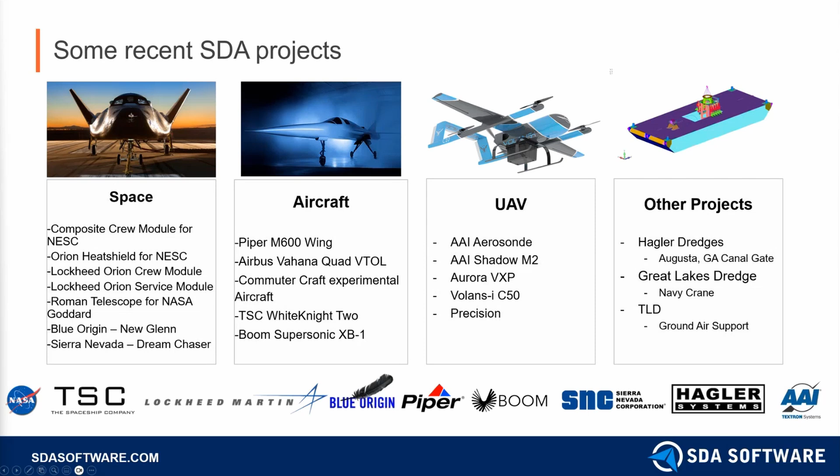Like I said, SDA Software, our specialty is the Simcenter portfolio, including FEMAP, STAR-CCM+, and others. We offer training, support, services, and that's background about the company.

But first, let's talk about Simcenter. What is Simcenter? What is included and how does it interact? Simcenter is the simulation portfolio from system simulation like Simcenter Amesim to component simulation or vehicle simulation for CFD, FEA, or other multiphysics offerings. And there's also the testing hardware and software. One thing that I'm going to cover later is how Simcenter STAR-CCM+ can integrate with HEEDS, which is a design exploration algorithm, and Teamcenter, which is a PLM data management solution.

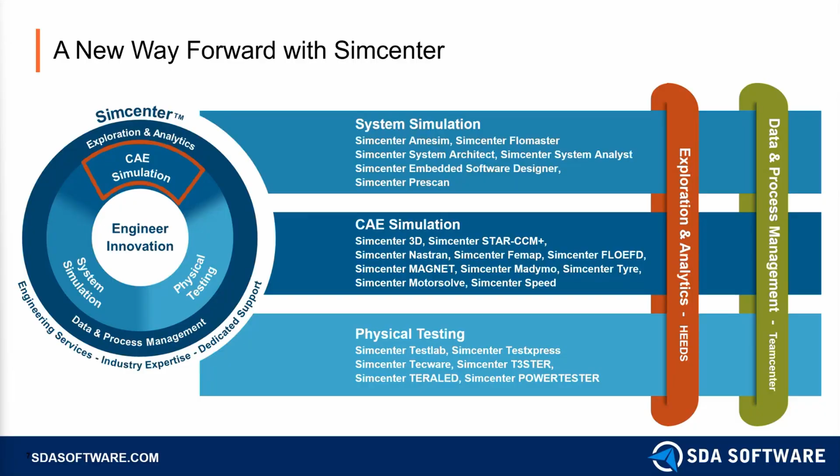What are the different CFD options? Who are they for? And what are the pros and cons? For a lightweight CFD solution, there's Simcenter FLOEFD, and this is primarily targeted for design engineers, mechanical engineers. Then we have Simcenter Flotherm, which is a specific electronics cooling solution for thermal engineers. It's targeted because of the libraries with built-in components that come with the solution. You're able to get the software and plug your components in so that you can very quickly and accurately recreate your configuration.

Then there's Simcenter 3D, which is a solution for FEA engineers. One of the key offerings is the TMG solver, which is an advanced space systems thermal radiation solver. And then finally, there is the flagship CFD solution, Simcenter STAR-CCM+, that is both integrated and has advanced multiphysics, and we're going to dive into this later.

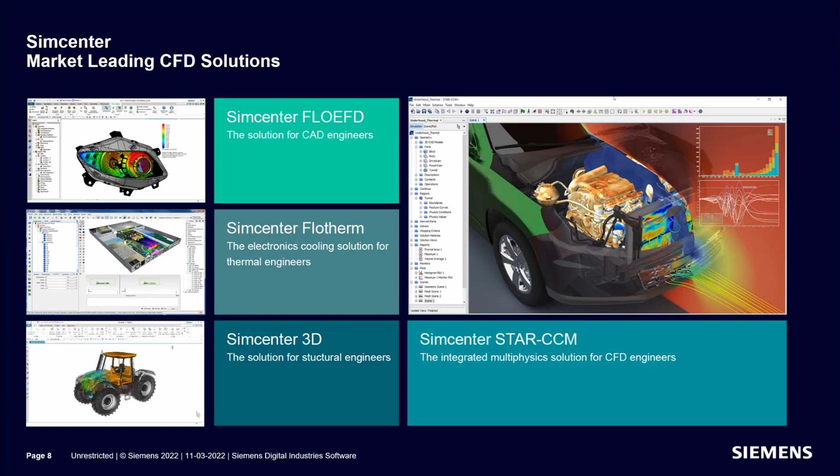But at this point, I just want to emphasize there is a solution for everyone. If you're a designer, analyst, or researcher, there's a solution for you. Like I said before, FLOEFD is made for designers. It's CAD embedded. And for general multi-purpose problems, there's Simcenter STAR-CCM+.

What is the difference between CAD embedded and traditional CFD? In this case, we can think of FLOEFD as CAD embedded, and Simcenter STAR-CCM+ as traditional CFD. The key takeaways from this table is that CAD embedded is lightweight. You can run it on a laptop. You don't need additional HPC resources. You don't need to be a CFD expert, and you can solve basic CFD problems.

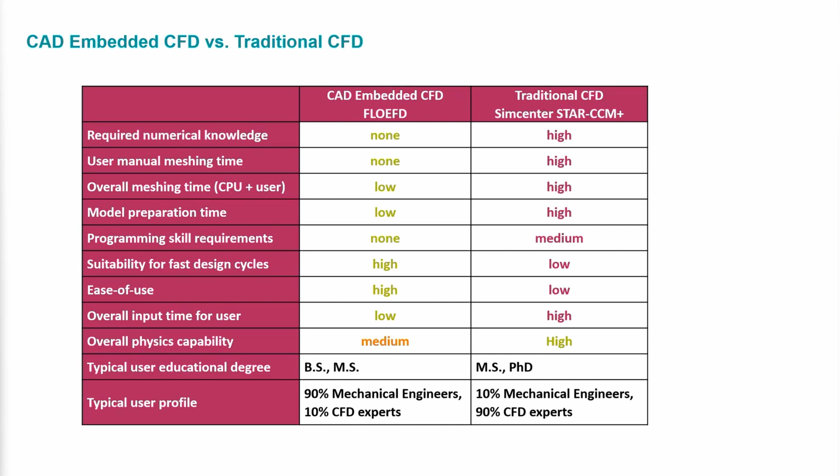The limitation is that it doesn't have the advanced multiphysics capability, which is where Simcenter STAR-CCM+ enters the picture. It does have a very high capability. It can solve a wide range of multiphysics problems. But with that comes the requirement for HPC resources, and the requirement for a CFD expert. So different solutions for different projects and organizations, and it just depends on what your needs are.

I saw this LinkedIn poll by Holger Marschall, and he asked what are the biggest challenges for you to adopt CFD for an industrial application. I kind of see this as a general CFD adoption question. You can see there's 500 votes, and the number one by far is the cost of licensing, followed by model preparation and simulation speed.

Whenever we're approaching the question of should this project or our organization be adopting CFD, the very first question we need to ask ourselves is what is the return on investment. In some cases there's a hard number, for example I had a customer who said a 1% improvement is going to be a $2 million return on investment. That's pretty clear direction.

I've had other customers say, well, it's hard to quantify, but it's really important for emphasizing our offering as a technical differentiator. So in some cases you can quantify it, in other cases it's more subjective. But before we get into the details, that's the question we need to ask and internalize before approaching these other options.

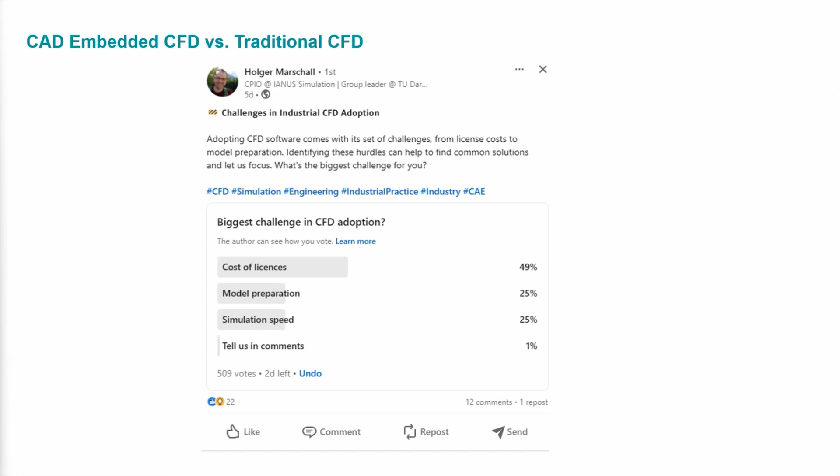Second, in terms of the cost of licensing, there are many options. This is why I highlighted the CAD embedded solution, because the cost of the license, everything is affected. The cost is significantly reduced across the board at the compromise of the advanced multiphysics offering, which wouldn't be available. So what I want to communicate in this slide is that we are committed to your project success, whether that's as services or software, and there's not one size fits all, and we can do a lot of things to reduce the cost or be efficient. I just wanted to highlight this because I thought it was a really interesting question.

Okay, now it's time to dive into Simcenter STAR-CCM Plus, a brief overview of this tool. What I'm going to be emphasizing in this presentation a lot is integrated workflows and advanced multiphysics. In the pictures you see here, we see some of the advanced multiphysics offerings, from marine application to turbine, multi-phase, Eulerian, Lagrangian, VOF. We have species interactions with the combustion, mixing, and the external aerodynamic analysis.

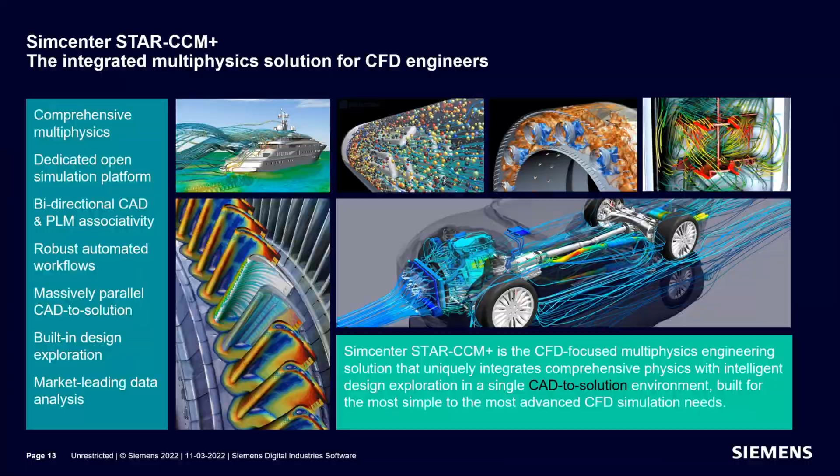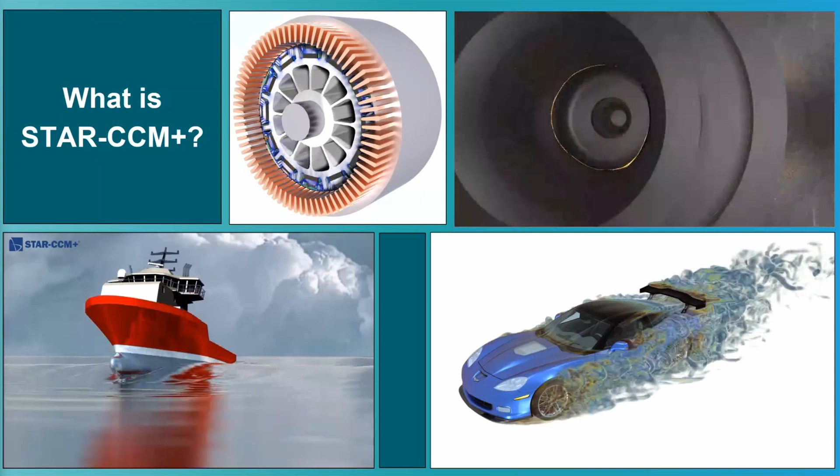Here are a couple more examples. On the top left, we see motion combined with electromagnetism. On the top right is a special add-on module, which is the in-cylinder simulation, and that allows you to model the atomization and combustion characteristics inside of a cylinder. The bottom left is a marine example of a vessel going through waves, and on the bottom right is external aerodynamics.

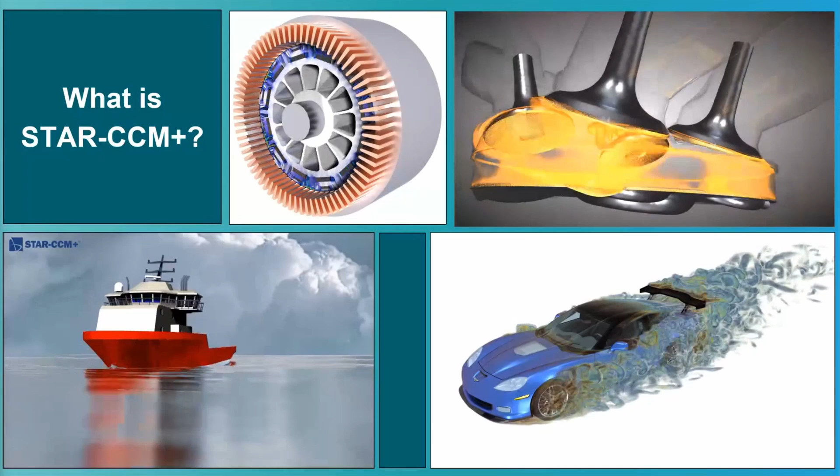Workflow automation, what does it mean to be integrated? In STAR-CCM Plus, you have the ability, let me just highlight these. A key value add is that you can import your CAD, create the volume mesh, set up the physics and solve your solution, and post-process the results in one integrated user interface. In addition to that, you're able to make a change, say in the CAD, which I'm going to show later, and propagate it through the workflow with minimal interaction. So it's integrated and it's self-contained.

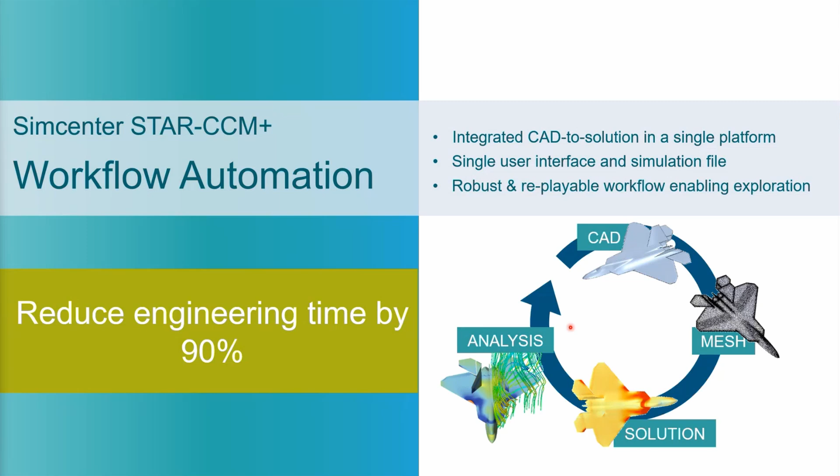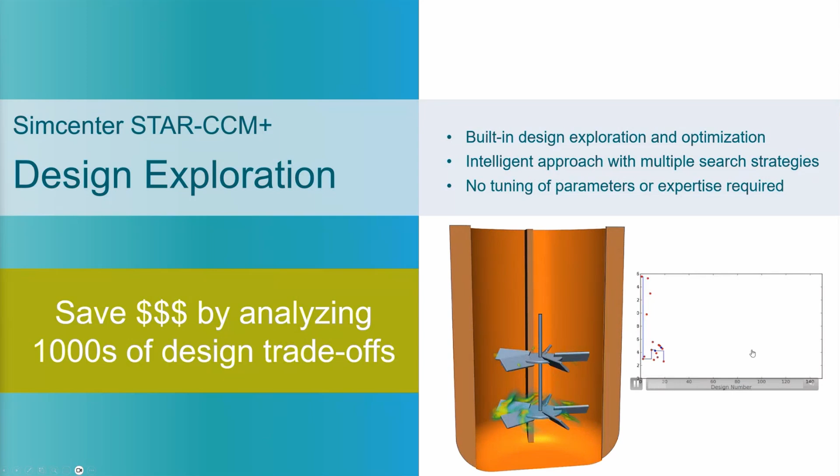Here's the design exploration. This is built in to the tool. This is showing an intelligent design exploration of a mixing tank where we changed the angle of attack, the number of mixers, the chord length, and the baffle configuration. With these inputs, the intelligent optimization design manager is able to examine and output an optimized design.

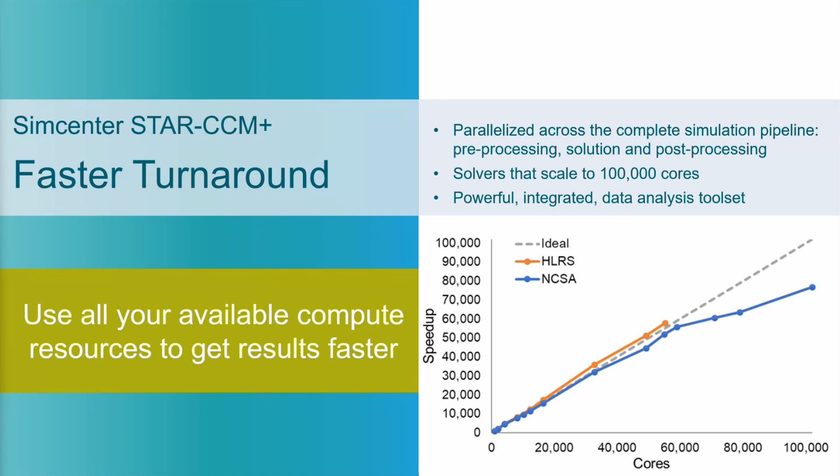Another thing I want to emphasize is that STAR-CCM Plus is scalable. If you have a large production problem that requires tens of thousands of cores, this is a good solution. Not only that, the main default license has unlimited cores, so you don't have to buy individual core packs to get more availability to adopt more cores. It comes with the default license. In addition to the default license, there's power on demand, which is a pay as you go option to rent a production license. There's also tokens as well as cloud enabled credits, so you can use the interface directly to access the license and solve.

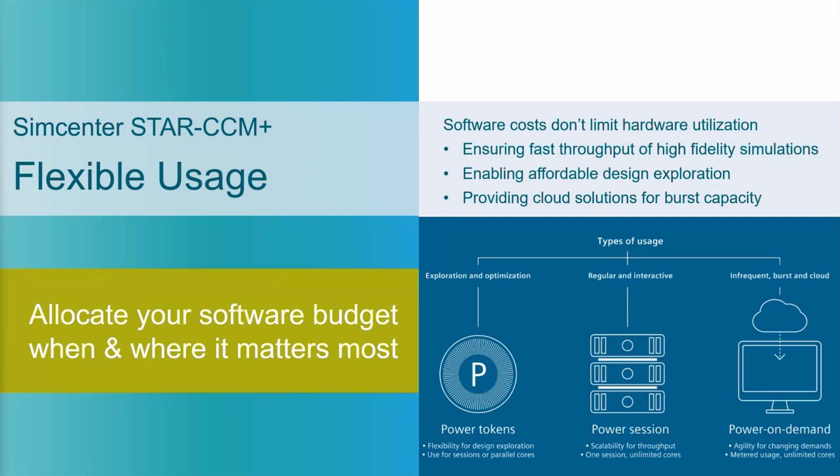Okay, now we're ready to jump into the demonstration. The demo today is going to focus on the workflow that I previously described and the design exploration capability of a simple ball valve problem. First I'm going to show how we can use Simcenter STAR-CCM Plus to obtain detailed engineering insights into the valve performance. Then I'm going to quickly and simply generate and test design variants within the tool. Finally, I'm going to look at different ways we can automate a design change for exploration purposes.

Again, the focus of the demonstration is on the workflow, and this happens in three main phases: build, test, and assess. In the build phase, this begins with the CAD, where we manipulate and prepare the domain.

Domain for computational discretization or meshing. In many cases, a significant amount of time can be spent on developing the first volume mesh, and Siemens has invested much development effort into reducing the time it takes to create that volume mesh.

Then we have the test phase, and this represents the validated physics models available in the software. All of it, I would say, except for a couple of special examples, like I showed before, the in-cylinder - there's also a battery design module. But besides those, all of the multi-physics capabilities are available with the default licensing.

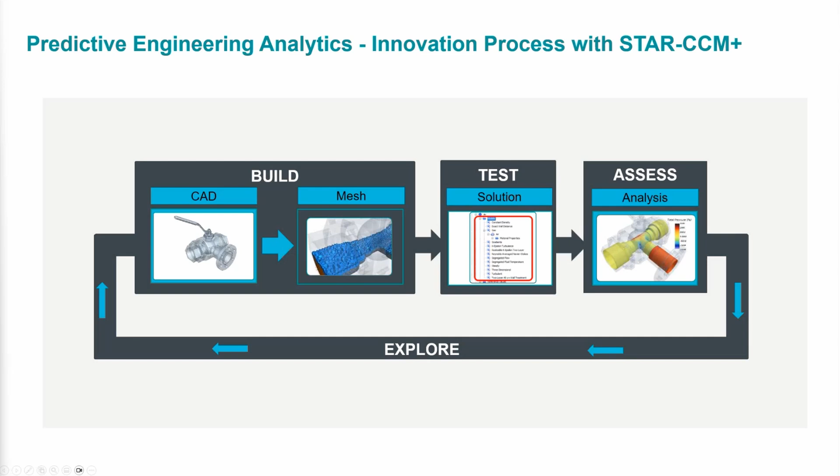So we begin with the build phase, and what I'm going to show you first is a tour of the intuitive graphical user interface. Then I'm going to prepare the CAD for volume meshing by creating end caps on the inlet and two outlet surfaces.

With these end caps, I'll be able to extract the fluid volume and then assign this domain part to a region so I can set the boundary condition types. And then finally, I will create the automated volume mesh.

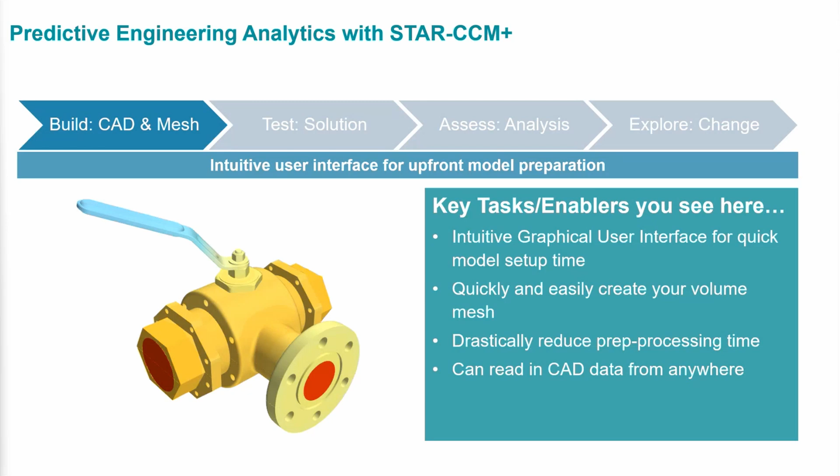Okay, so let's dive into the demo. Okay, so here is the user interface.

On the top left, we have the simulation tree, and this represents the different phases of the workflow. Below, we have the property window, which is where we enter the specific information for the associated selection in the simulation tree. Below that, we have the output window, which gives us the output of the current operation. And in the main viewing window, we have the model where we interact.

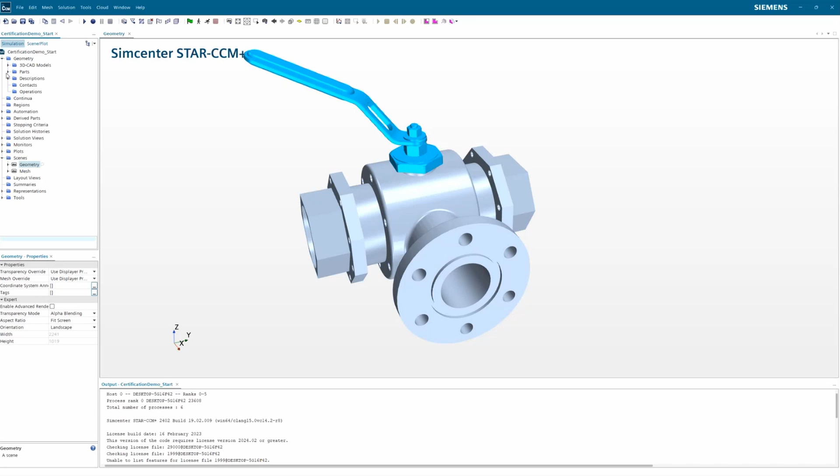Okay, so while I create these end caps and prepare the CAD for meshing, I just want to highlight some of the CAD related value adds that are available with STAR-CCM Plus.

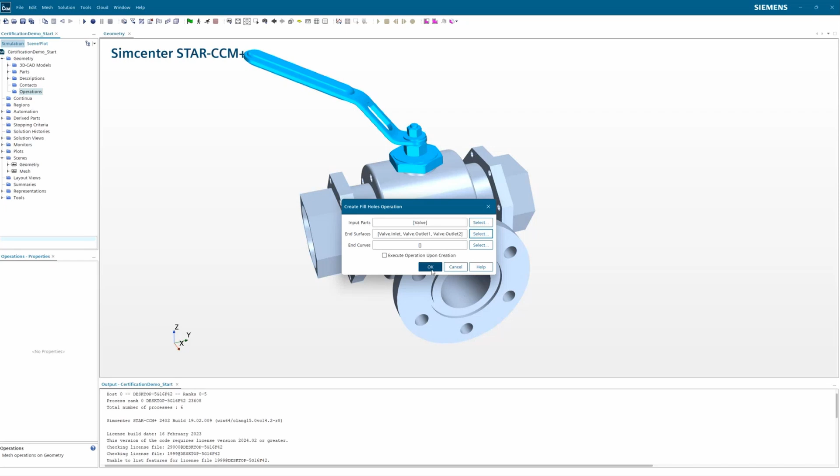And the first is the NX to STAR-CCM Plus connection. What that means is if you're an NX user, you have the ability to get this add-on where you have CAD client bidirectional transfer of parametric data.

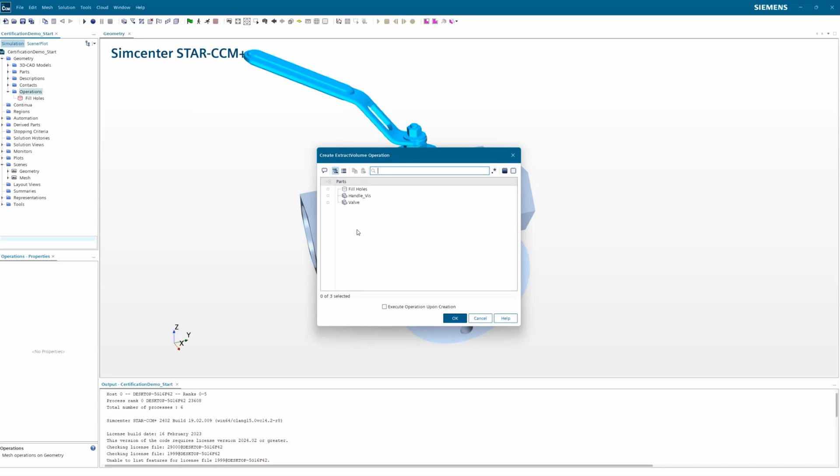And what this means is that in NX, you're able to define your CAD parametrically, or define different characteristics parametrically that you want to change or explore. You're able to connect directly to STAR-CCM Plus and have the CFD analyst access those parameters, modify those parameters, and then have it send back to the NX designer.

And that's very powerful, especially if you're in a PLM configuration.

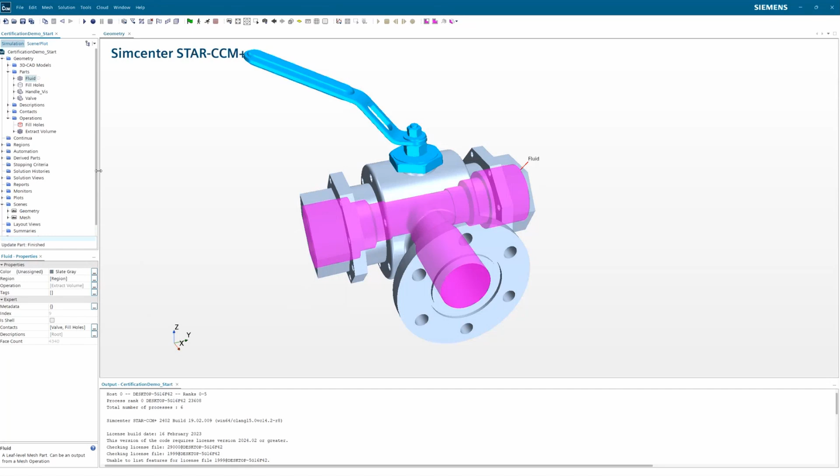And then the other CAD add-on is the CAD Exchange, which gives you the ability to interact with CAD native file types. So for example, I'm working with a customer who uses SolidWorks, and I'm able to directly interact with those part files, which is beneficial because I'm able to see the exact same surfaces that the designer is able to see.

Which is very helpful. And then finally, STAR-CCM Plus without any add-ons has the ability to interact with the CAD neutral file types, and it's best to use the parasolid file type, that's period x_t. And that's important because that's the Siemens kernel, and that's what's recommended.

Okay, so now ready to volume mesh.

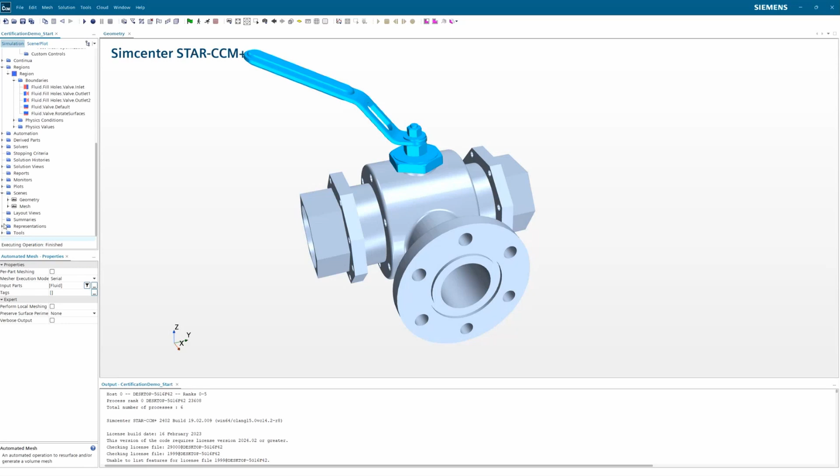Okay, so I just ran through all of the build actions.

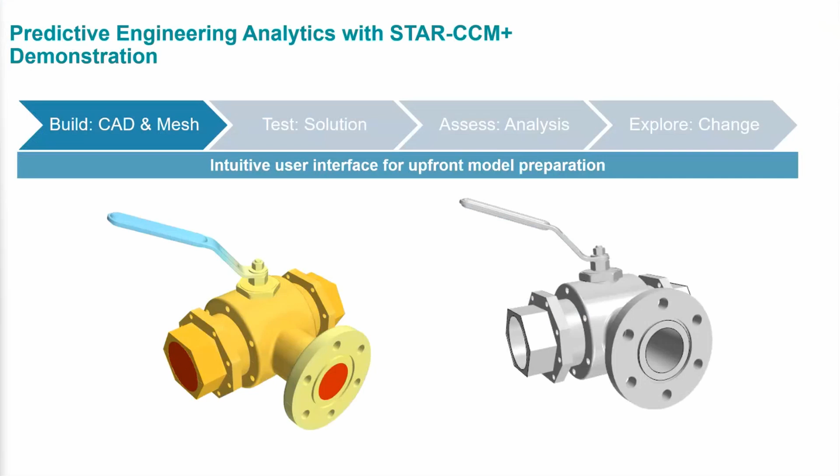You can see while I was talking, I was able to significantly reduce the pre-processing time by quickly interacting with the CAD model itself using the CAD preparations, the fill holes and extract fluid volume. This improves our accuracy to maintain associativity to the design data, which enables us to have quick and accurate investigation of our early design concepts.

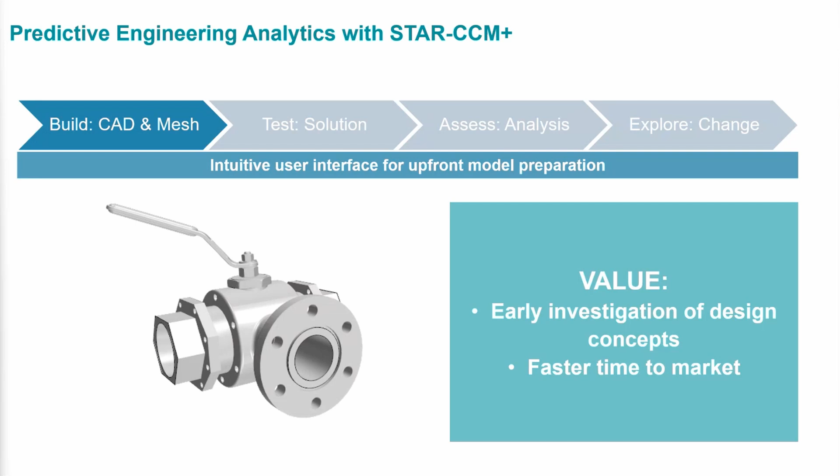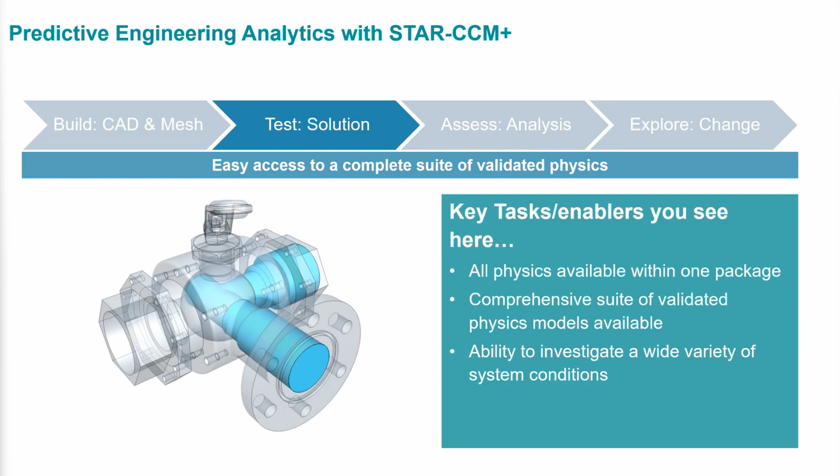Now we're ready to move on to the test phase. In this section, I'm going to create the physics continua and select the physics models through an interactive wizard for our problem today. It's going to be steady state water flowing through our valve assembly. I'm then going to change the inlet mass flow rate and adjust the stopping criteria.

Okay, let's jump into the demo again. So while I'm selecting the models, I just want to emphasize the design paradigm behind STAR-CCM Plus.

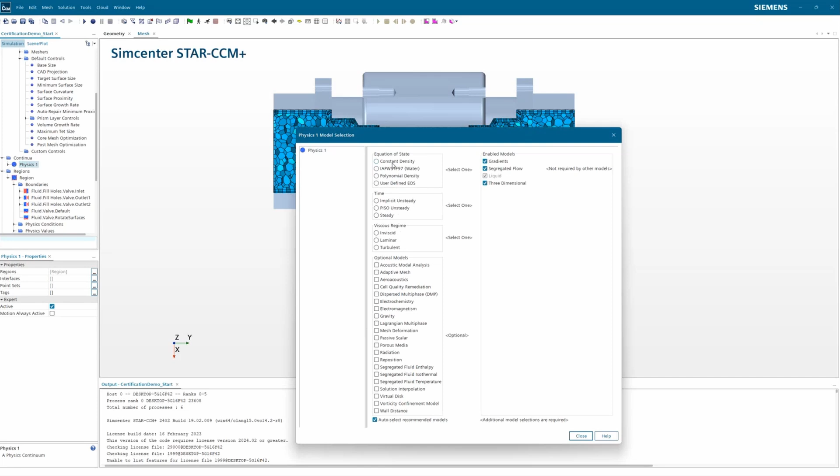Siemens, and previously CD-adapco, has taken the design approach of developing the code so that the different physics models are able to interact with each other. This is obviously not true for every case, but that is the design approach and intent that they've taken. So what this means is that you are able to model

different multiphysics in the same simulation. Furthermore, what it means is that models are not siloed so that you can only use them one at a time.

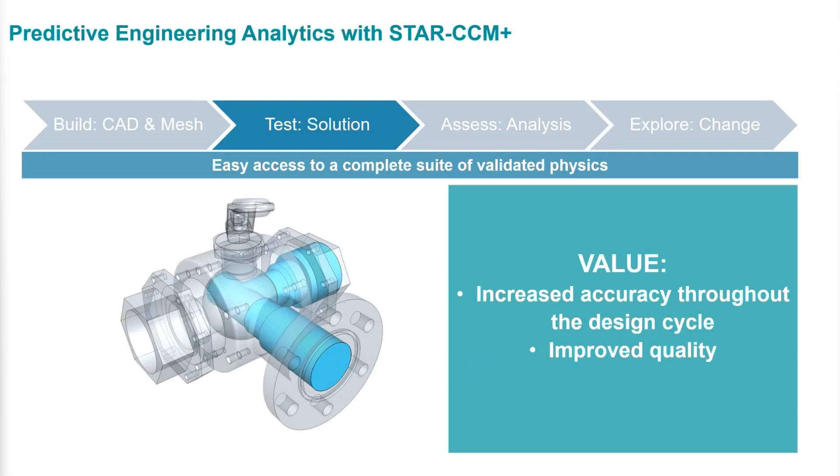Okay, I'm just going to adjust the stopping criteria because I know it converges pretty fast. And that concludes the test phase. So I was, in a matter of seconds, able to quickly and easily select our models for today's simulation. This is going to allow us to investigate a variety of different scenarios and increase our accuracy throughout the design cycle.

Okay, now we're ready to move to the assess phase. In this phase, I'm going to create mass flow rate reports on the outlet surfaces and pressure drop reports between the inlet and the two outlet surfaces.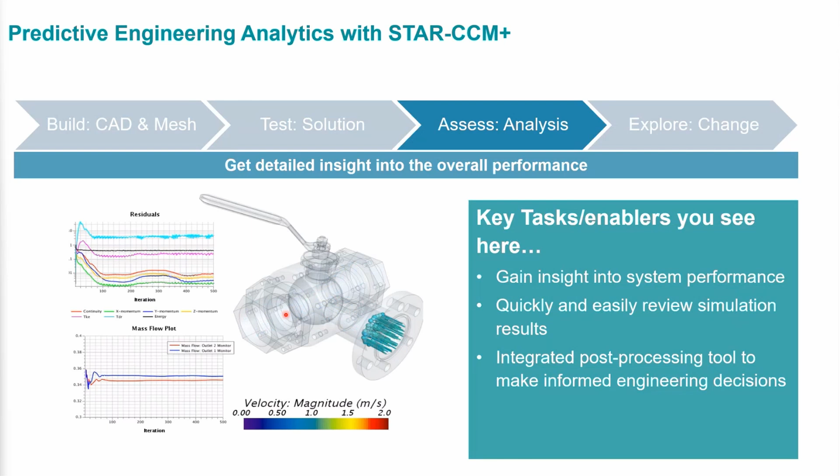Then I'm going to create scalar and vector scenes of the pressure and velocity fields so that we can visualize the results. And then finally, I'm going to run the simulation.

One thing to note about Simcenter STAR-CCM+ is that there's no hidden residuals. All of the residuals are shown when you run the simulation, and that's so that you can understand how your simulation performs without anything going on in the background.

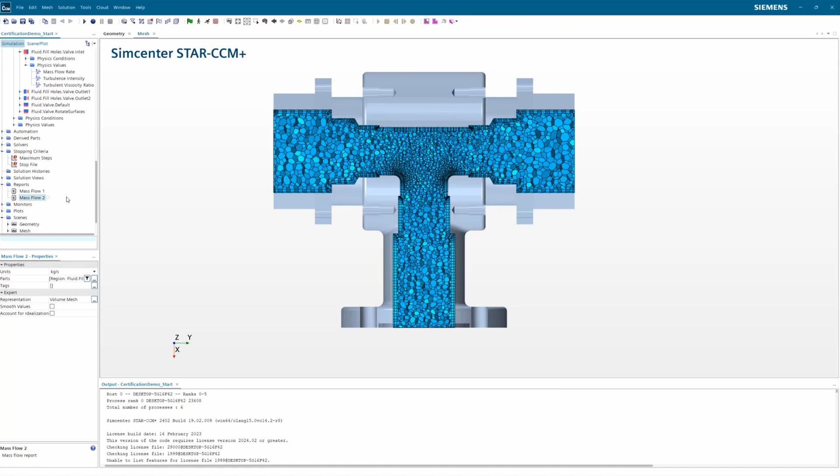And then another thing I want to emphasize is that the reports that I'm using today are built in, and that's really helpful because I don't have to create any custom script. If I want to know the flow rate on these surfaces, there's a report for this. There's a report for this function.

The reason why I'm creating these reports is so that these are engineering quantities of interest that we want to view as the simulation progresses. This is another important way of tracking convergence.

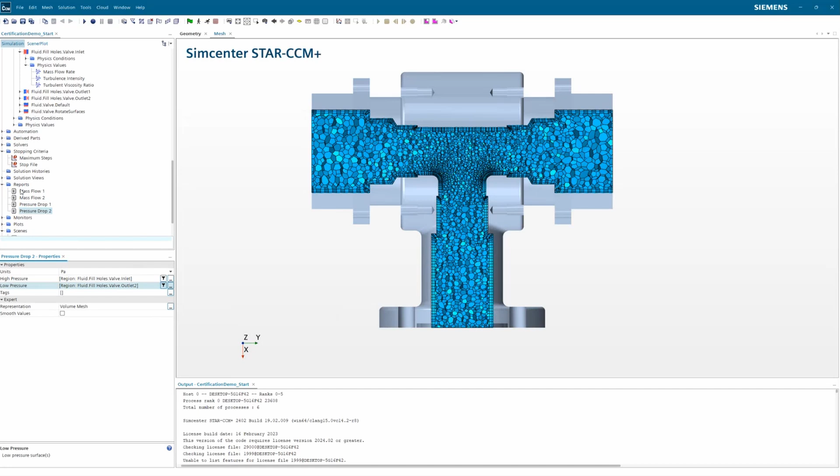Okay, so from these reports, I can create monitors and plots. This is one of the tools we're going to use to understand convergence.

Now I'm ready to create our scenes.

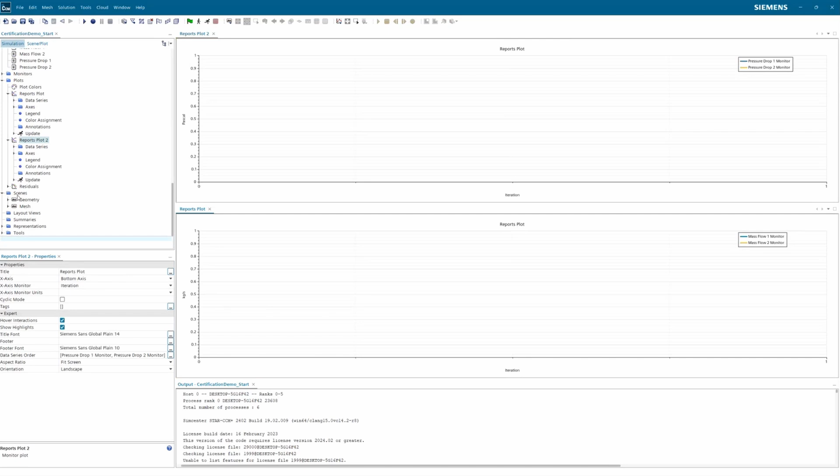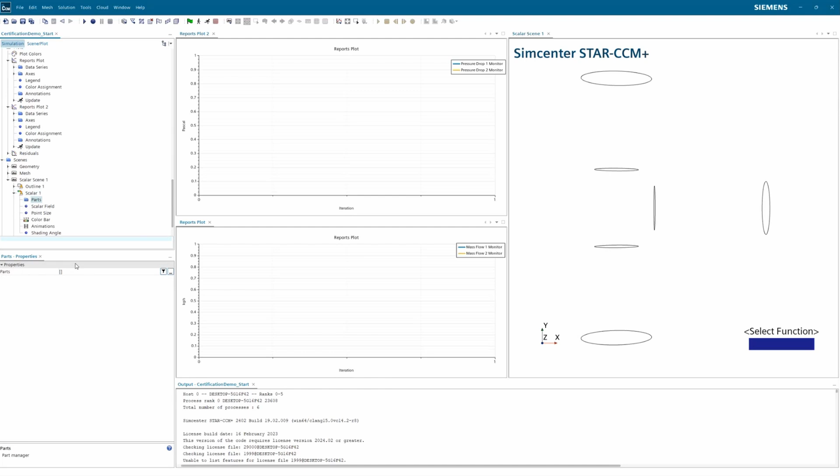So one of the attributes that I really like about the post-processing is that I'm able to include multiple scenes in the same view. In this example, I'm showing that we can view pressure on a cut plane through our geometry.

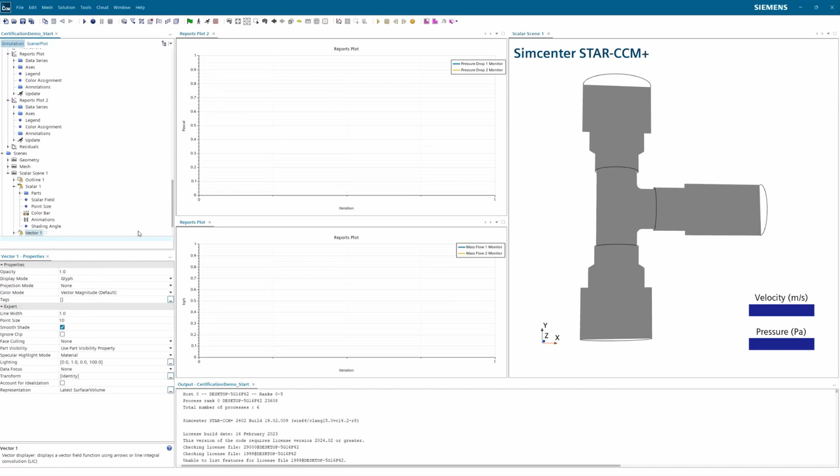And in the same scene, I can add the velocity vector field on the same surface so that we can see the pressure and velocity on the same view. We can highlight that by changing the color bar.

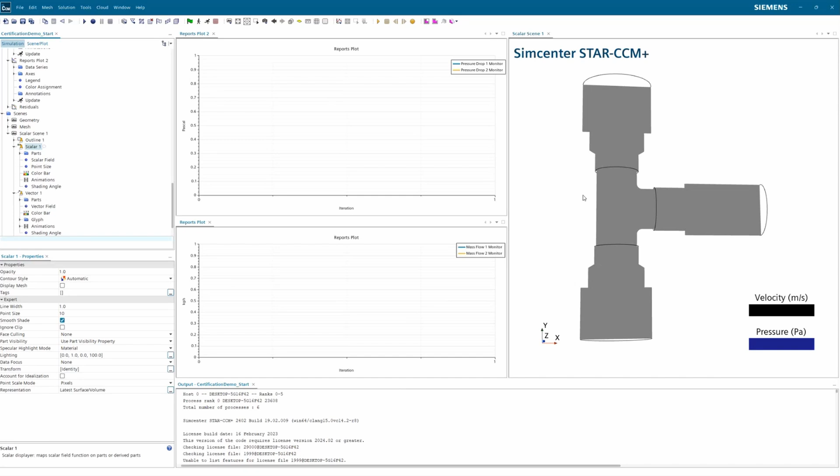Okay, so now we have set up our reports and plots and scalar scenes before we run, so that we can understand and visualize our results.

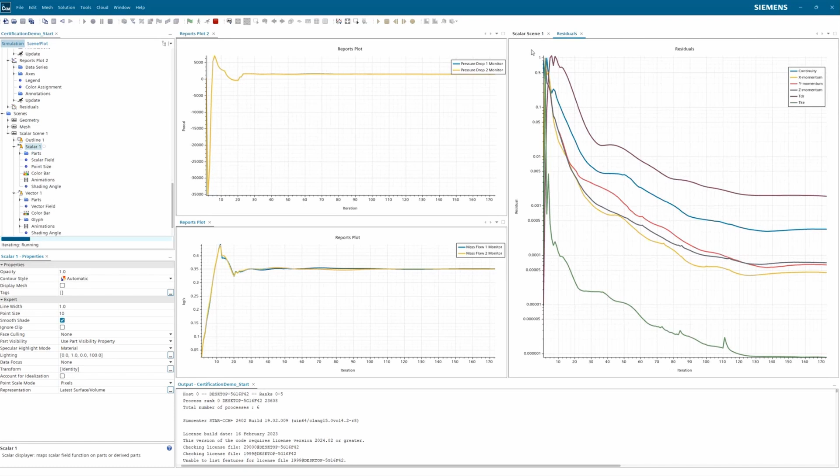Okay, we can see that the residuals automatically pop up. And we see that both the pressure drop and mass flow converge very quickly.

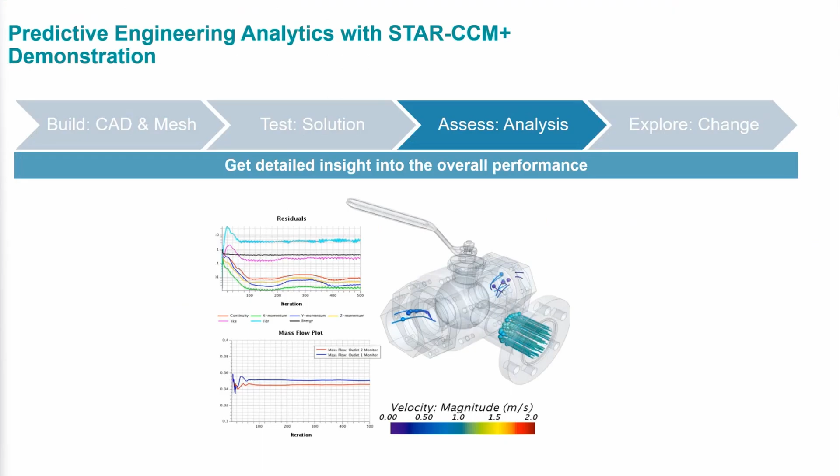So the value here that I just showed, I just created what we can think of as a baseline CFD simulation. I was able to do that very quickly to create a concept design of our fluid component and analyze its behavior.

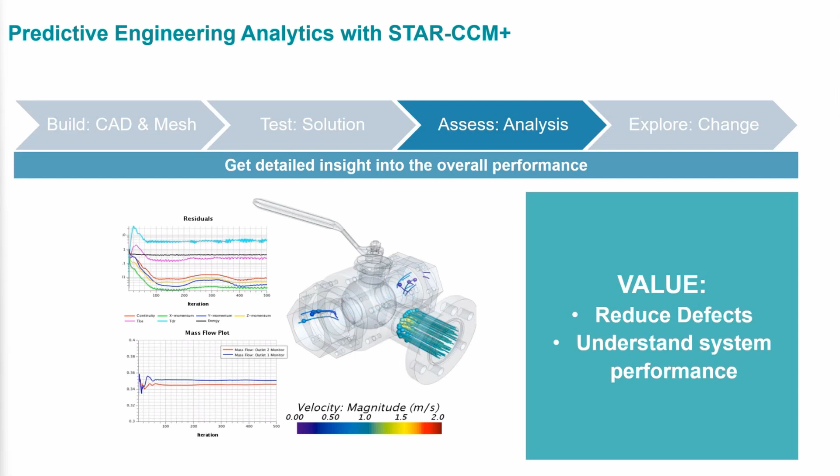Now that we've completed the 3 basic phases, we're going into the design exploration phase. In this simulation, we defined a parametric value associated with the valve position called rotate angle. I'm going to revisit the build phase, change this parameter, which will modify the geometry, and propagate that through the entire workflow. Then I'll increase our stopping criteria, rerun the simulation, and at the end show you how we can automate this change.

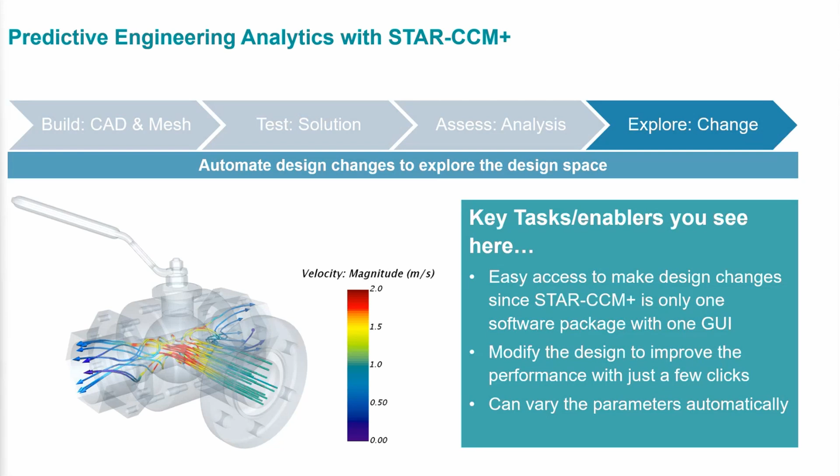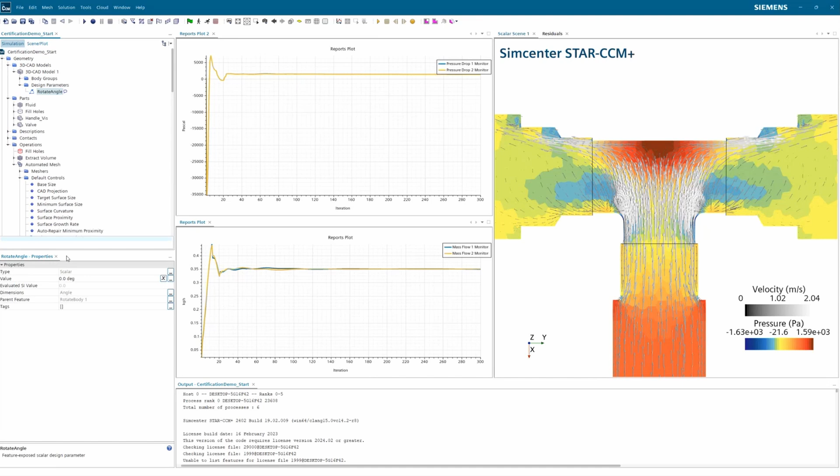Okay, let's jump back in. Here's our previous run. I'm going to revisit the geometry phase, and we can see that rotate angle is a parameter that's defined. I'm just going to show the geometry scene so we can see how this change will impact our model, and change the opacity so we can understand the ball valve configuration. So here you can see it's at 0 degrees, totally open.

Okay, so now I'm going to change this parameter to 60 degrees. When I did that, you see there are warning indications next to the CAD and mesh. What this means is that a change has been made and the current configuration is not as it was before.

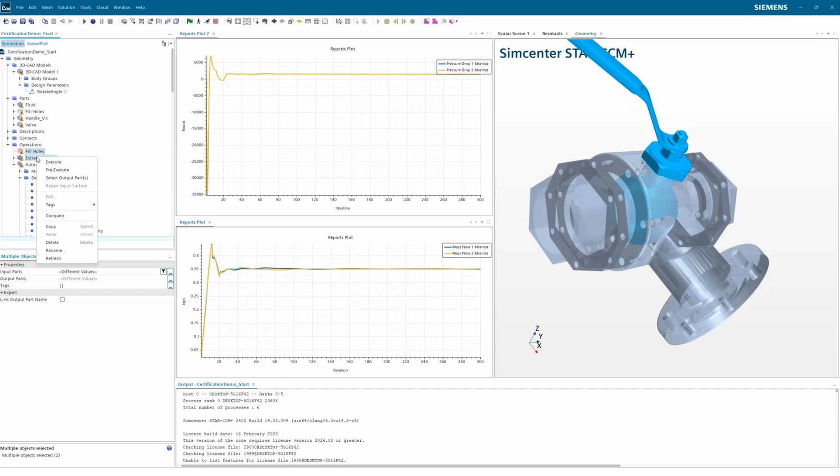What I like to do as a debugging tool is execute the CAD operations first, because often in a production simulation you may have millions or tens of millions of cells, and it may take some time to mesh. So I like to check the CAD operations first before meshing to confirm this is the behavior I want to see. As you can see, the valve position has rotated in the counterclockwise direction 60 degrees. This is the behavior we want to see, and that gives us the confidence to remesh.

You can see here in the properties, called mesher execution mode, I have it set to serial, but you're able to get a couple of multiplication factors by changing it to parallel, which is one of the ways Siemens has enabled you to speed up your volume meshing.

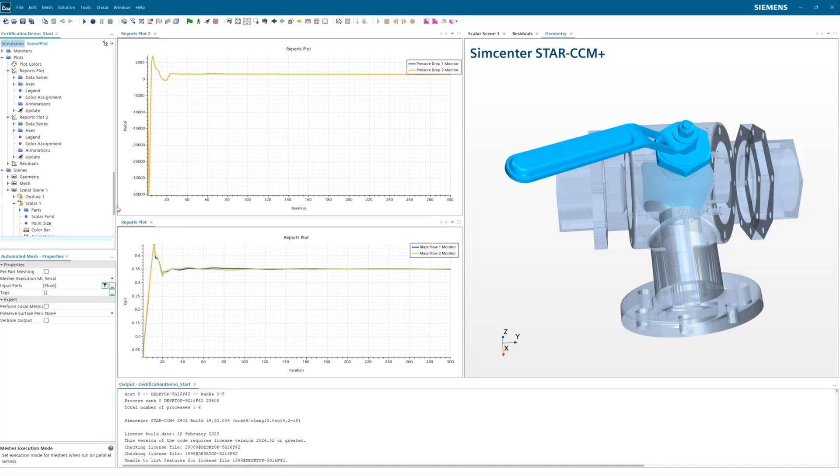Okay, let's view the volume mesh. So by changing that parameter and propagating it through our build workflow, we're able to see that the mesh updated automatically. I didn't have to go visit anything else, I just made the change and executed it.

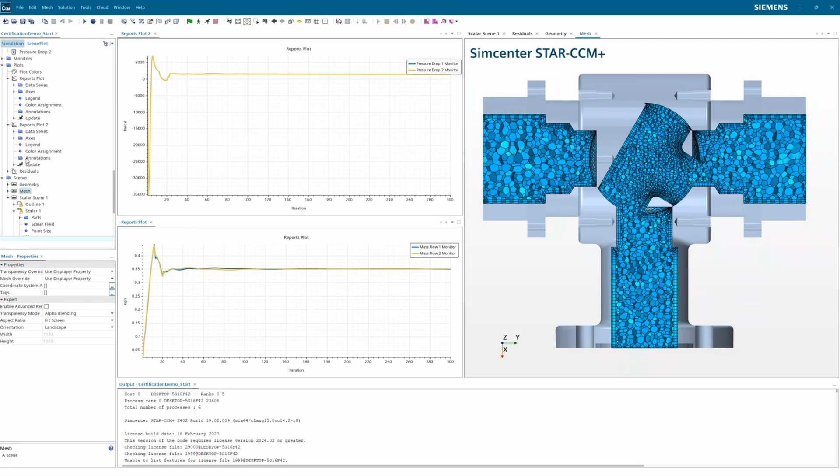And now I'm going to increase the stopping criteria so that we can run on top of the previous simulation. While it's running, we can see that the mass flow to this first outlet has been totally cut off. The value is 0, so all of the flow is being redirected to the second outlet. We can see that the values converge pretty quickly.

And the pressure and velocity fields, we can just double check the residuals also converge, and we can see how the flow is redirected.

So what I just showed you is a manual way of making a design change. We had a parameter, I adjusted the parameter, and then propagated that through the workflows.

Now there's a couple different ways you can automate this. One thing to note is that the API comes with the software, you don't have to pay any extra. You're able to download it, access it, and the API is written in Java, which they recommend using NetBeans. I have customers who use Python and want to do their automation using Python, so we have to first create the Java code and then use Python to manipulate that Java code and execute it through their workflows.

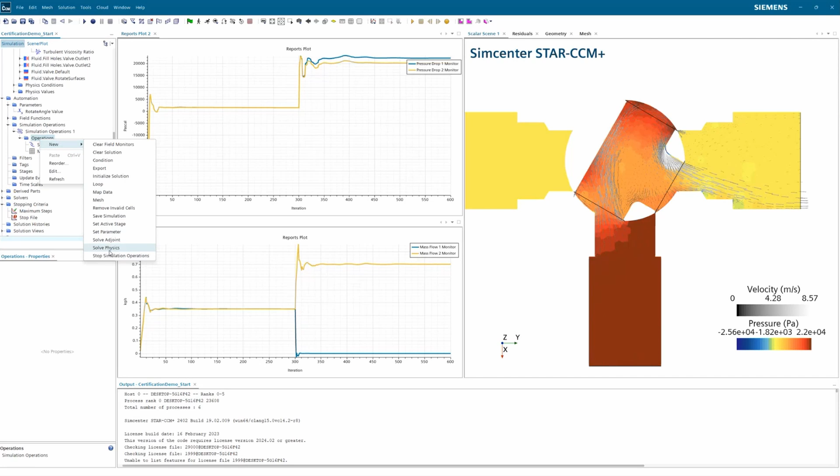So we set a parameter, and then next I want to execute the volume mesh. What this means is it's going to execute through all of the operations to volume meshing. So we set our parameter to a new value, we have the mesh, and then we're able to solve the physics and then maybe save the simulation.

So if we put this in a loop, and then we can put this in a loop as well. This is a lightweight way of automating a design change.

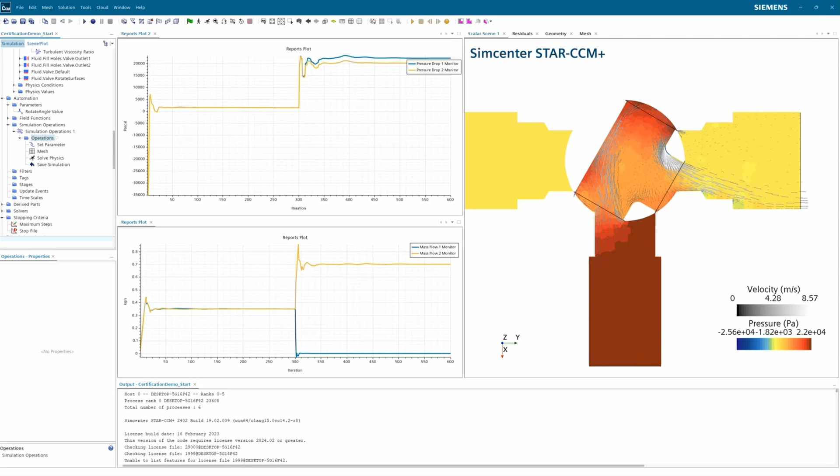And then finally, you can create a design manager project, which also comes with the software. In this project, I defined a manual sweep of our rotate angle from 0 to 90 degrees at 10-degree increments. So the rotate angle is like a design input.

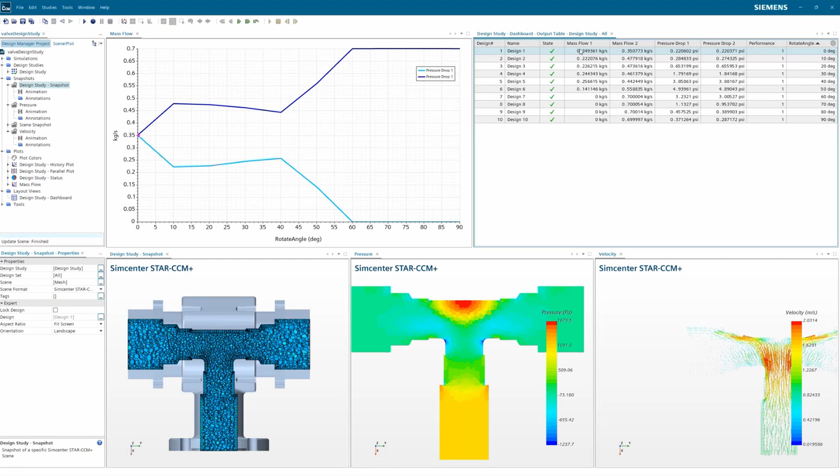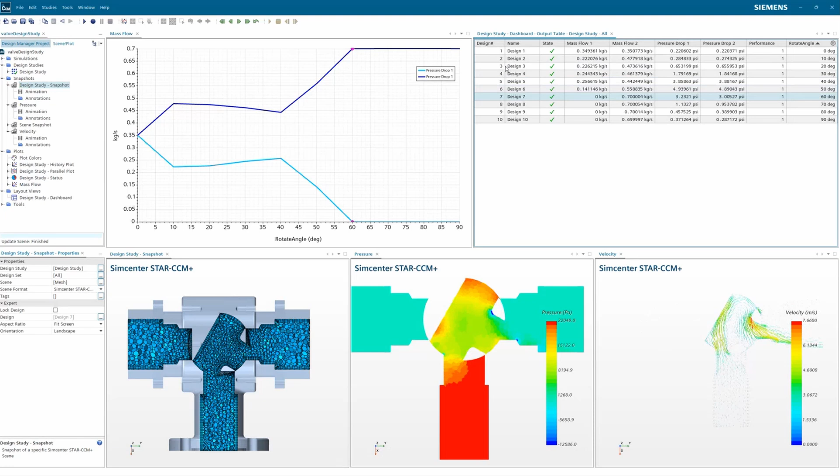And what this allows us to do is conveniently understand interactively how different design configurations impact the performance, making it easier, reducing the barriers for us to make informed design decisions.

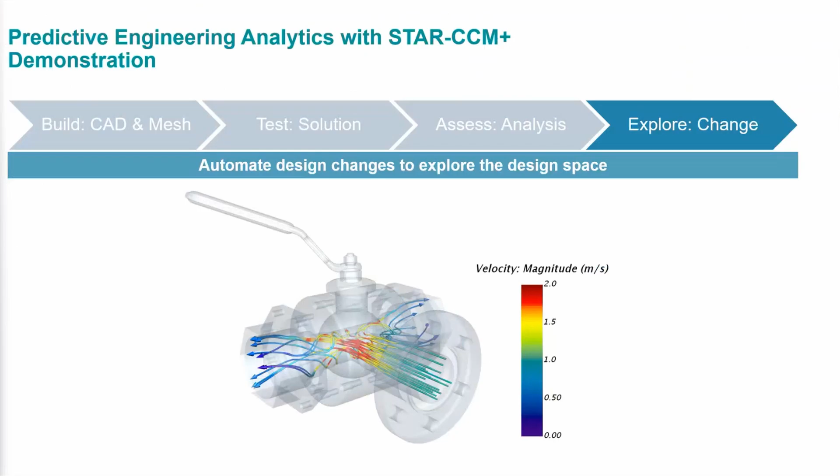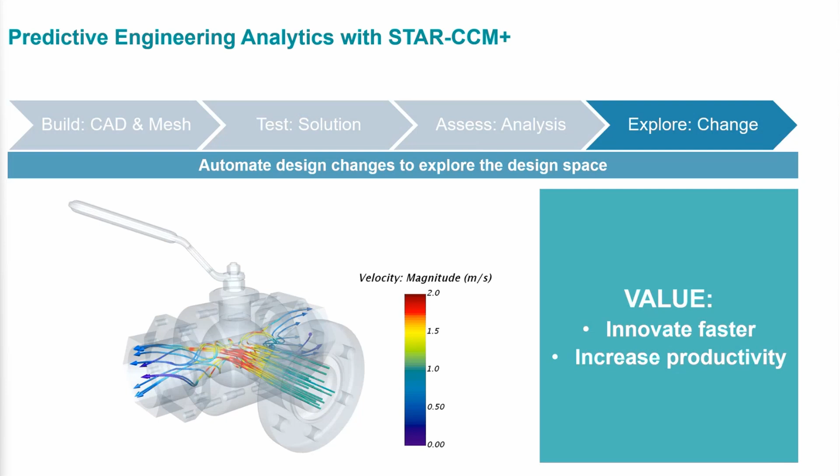And the value here is that STAR-CCM+ makes it easy for you to not only create, but to change the design of your system, making it a lot quicker and easier to make decisions so that you can innovate faster and have a more customized solution.

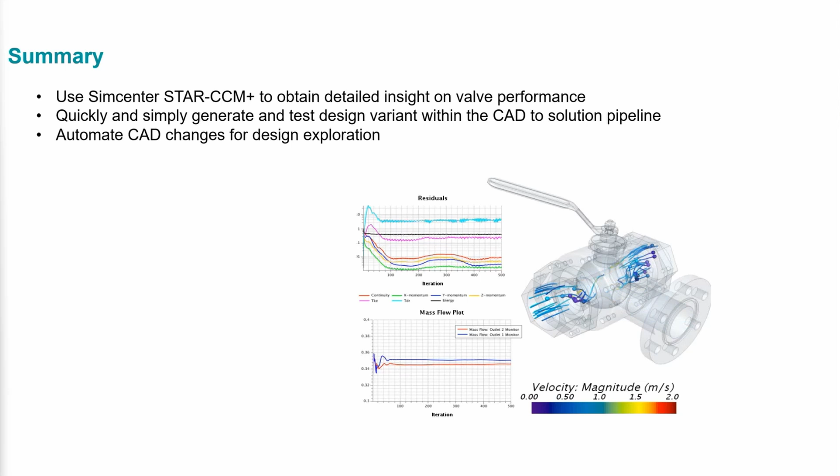So in summary, what I showed you today is, first, I created a baseline valve simulation. Then I manually changed a design parameter. And then I showed you a couple different ways how we can automate a design change.

So I just want to highlight a customer success. Kawasaki Heavy Industries, specifically their motorcycle division, is responsible for the development of the Ninja H2R, which is a high performance motorcycle. This is very challenging because they need to manage the heat generated by the engine and also provide aerodynamic devices so that the motorcycle is stable at high speeds.

Their development team adopted Simcenter STAR-CCM+ and the automation capabilities that I showed you today. By doing this, they were able to cut down the development time by 75% over their previous process, which basically means they get a better design in a lot less time.